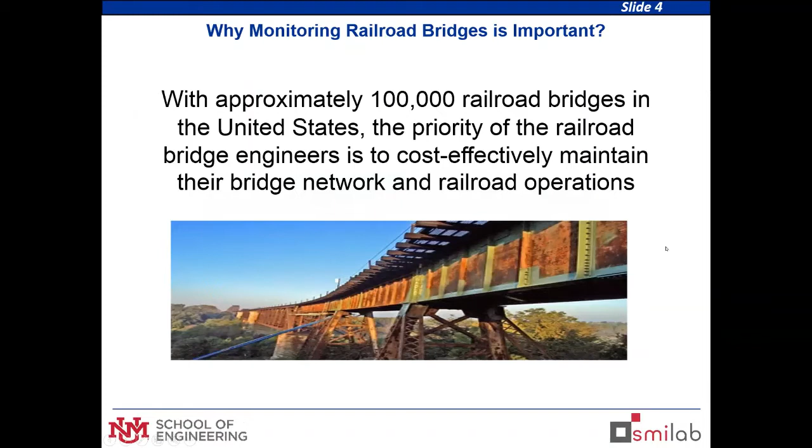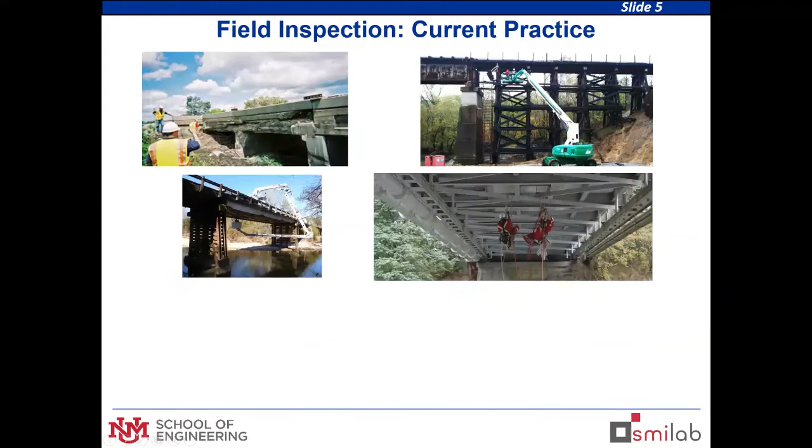The motivation is the monitoring of infrastructure in transportation infrastructure. The background of our research was specifically on railroad bridges. With approximately 100,000 railroad bridges in the United States, the priority is to maintain and repair management approach of this problem. So we're going to talk about maintenance of existing infrastructure, the state of the art, as some of the former presenters showed us.

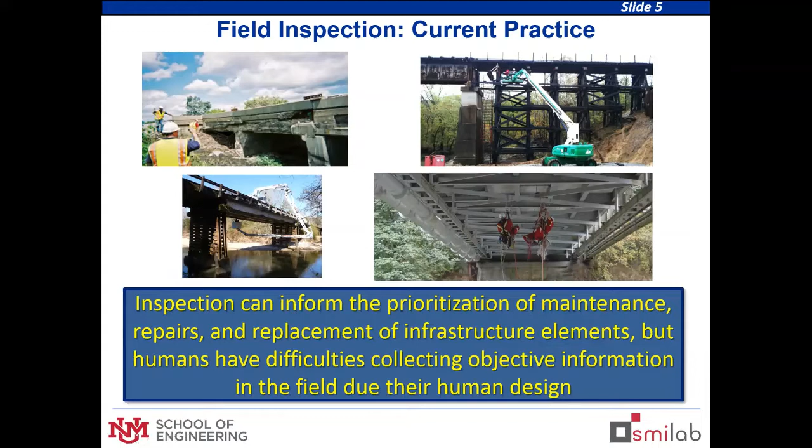You could see the inspection can inform the prioritization of maintenance, repairs, and replacements. As you can see, this is conducted by humans. So what we are looking at here is applying technology to monitor these critical bridges or nodes of our infrastructure. And we are interested in using sensors. We've been using sensors in the past. We build wireless sensors and attach them on the infrastructure, but they are costly. They take time and access. You need to actually climb to that structure to attach your sensor.

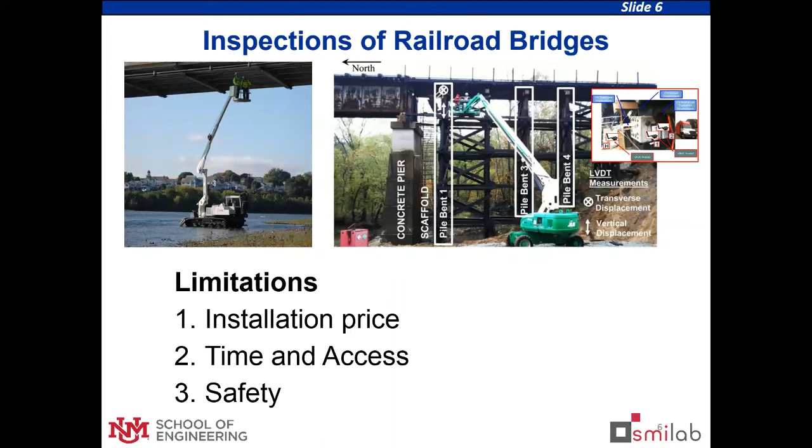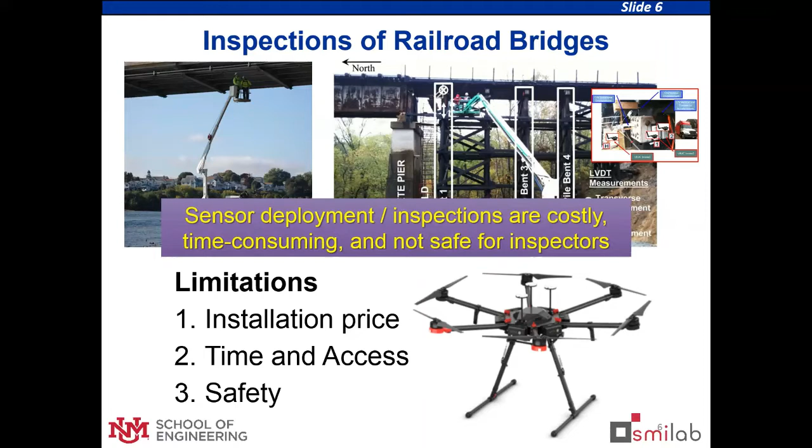So we are trying to explore other approaches, which is with the use of drones. And the goal of this presentation is to actually explore how can we enhance the drones to collect information by adding some devices to these drones. So the traditional monitoring with the UAVs is using cameras, where you can collect videos or images of that infrastructure, and you can inform of the condition of that bridge.

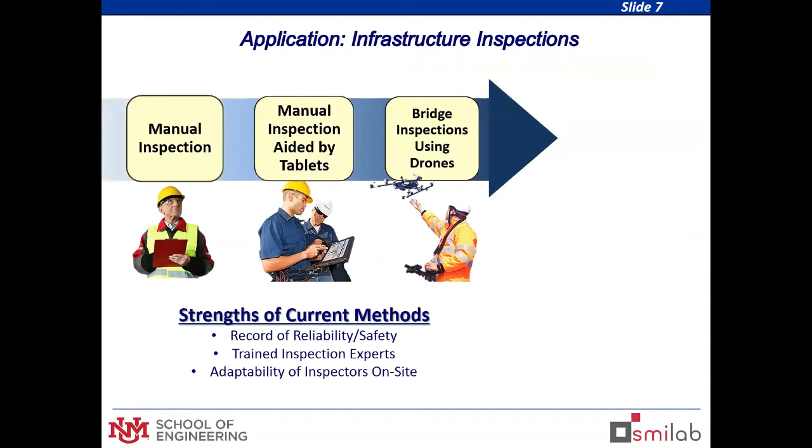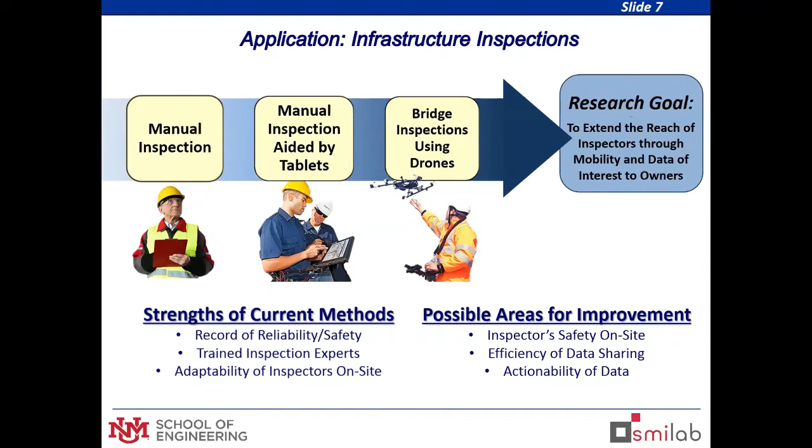We are interested in using computer vision for obtaining this information, but we are thinking, could we actually collect data on real time using the drone that tells you the condition of the structure on real time? Can we actually sense the status of the bridge? We've been using this enhanced drone for structures.

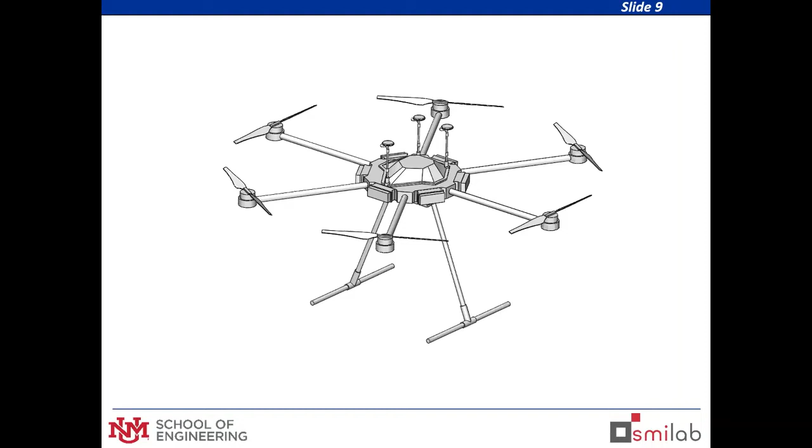We have interest on large drones in our application because we're gonna attach hardware and software that drones don't come with. So we're actually interested in building our own types of drones. So it's related to this stakeholder-based sensing. So we ask the stakeholders, what do they want to collect? And we create the drone to collect that information.

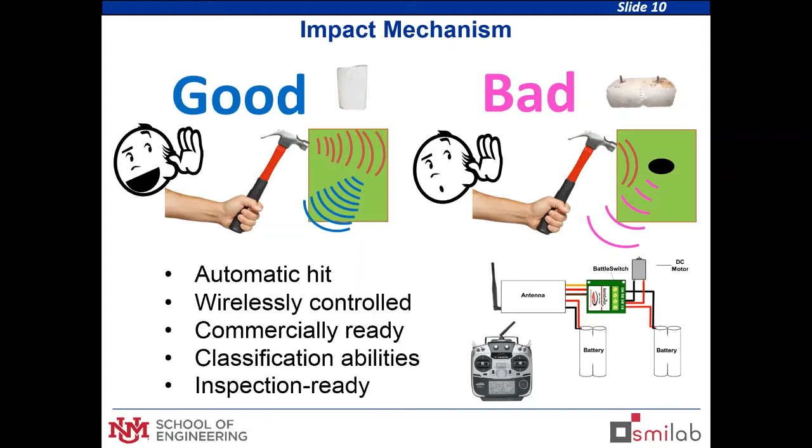One of the areas that we work, actually this was work with the Los Alamos National Lab, was to create this hammer that the inspector uses for collecting this tapping without climbing. So we added a hammer to the drone, and in fact, this is a Tran-SET project, for Tran-SET 4 we are going to use for rocks of interest for the NMDOT. But this was the incubator of that tap testing. And in this case, we created an off-the-shelf wireless tap testing that we designed so it wouldn't have a resonance.

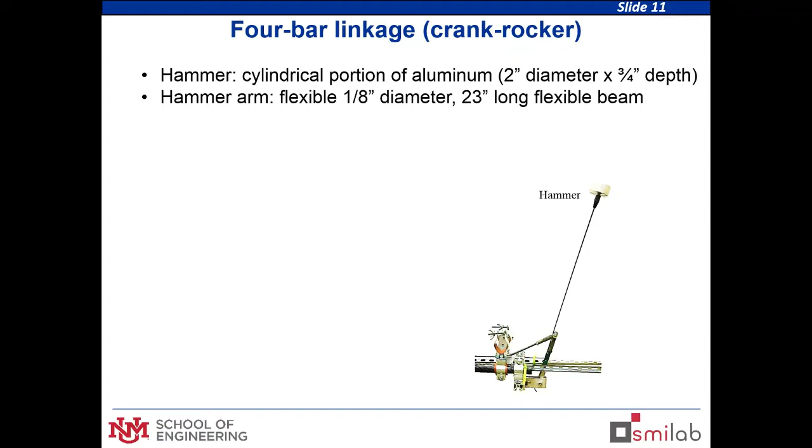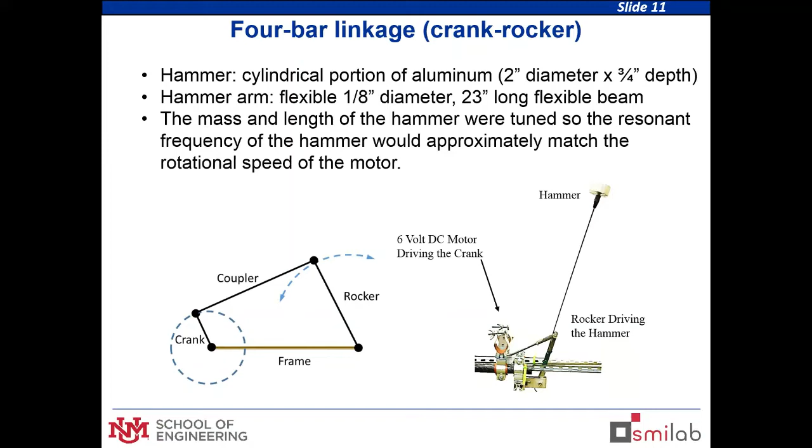Dr. Mascarenas in Los Alamos and I worked one summer. Emmanuel Ayorinde, he actually was a community college student in mechanical engineering who did very well, and they actually won the summer student competition. And we created a crank rocker. It's a very simple mechanism where you can have an eternal tap testing with the same frequency and energy, so that way you can compare the taps that you obtain.

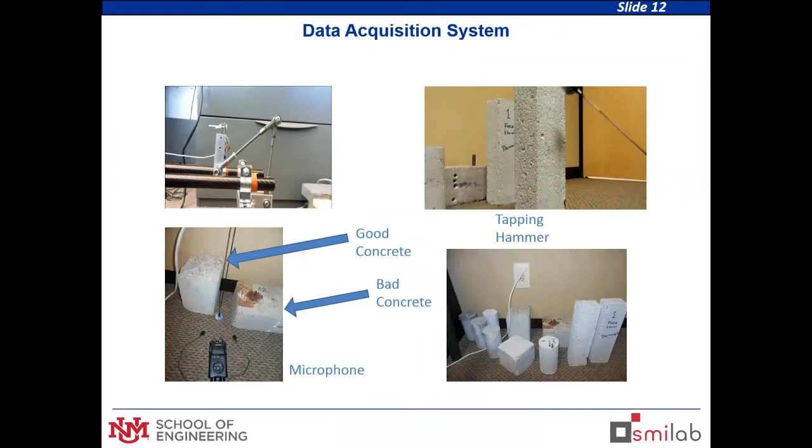This is the drone that we created, and this is a little example of the crank rocker. It's a couple clevises and a 6 volt DC motor that can be tapping with that hammer, and with the sound we conduct a machine learning approach of that sound. In this case we use 5 samples. It's a little loud, let me lower this down.

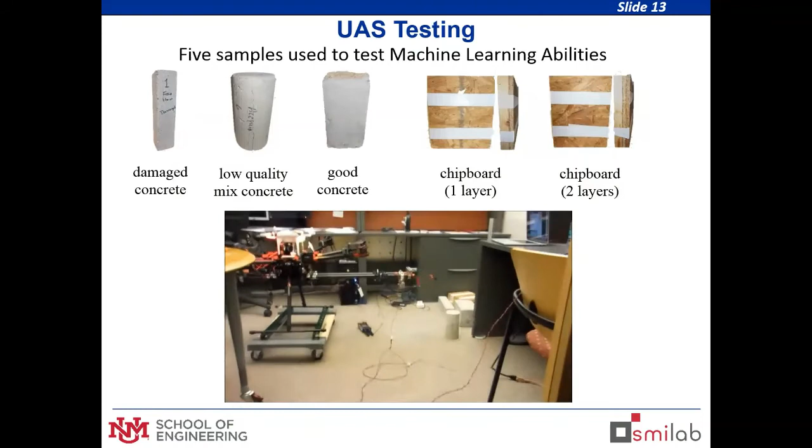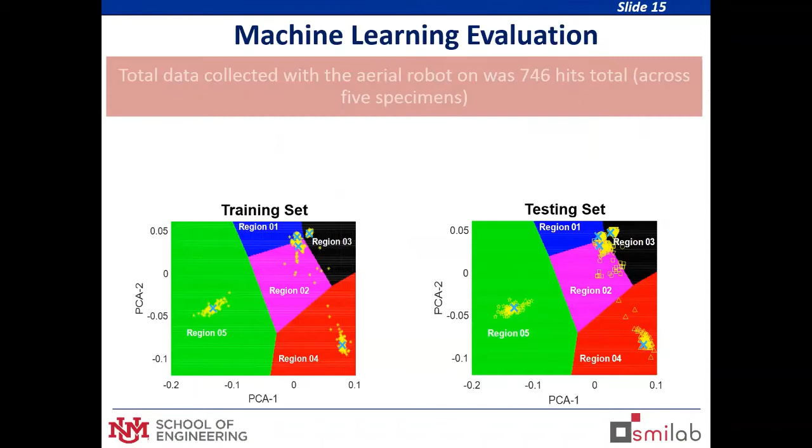But keep in mind, these were similar specimens, and we didn't filter the data—we just hit. We even used the first hits and last hits, which we should have removed because they had less different energy. Even then, we wanted to show what we got, and it was actually very good.

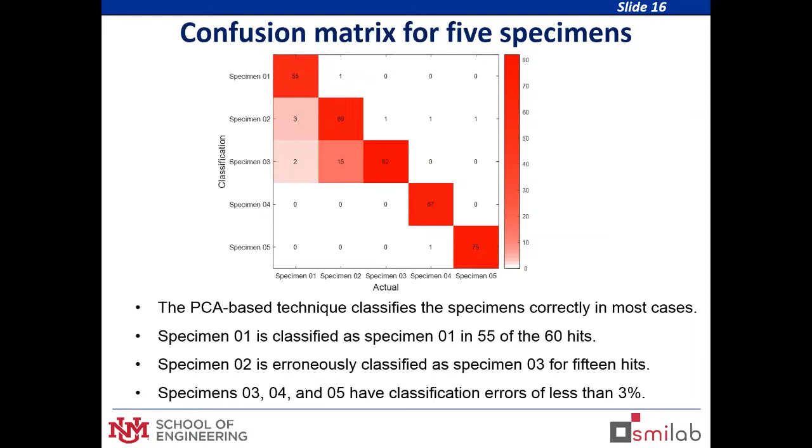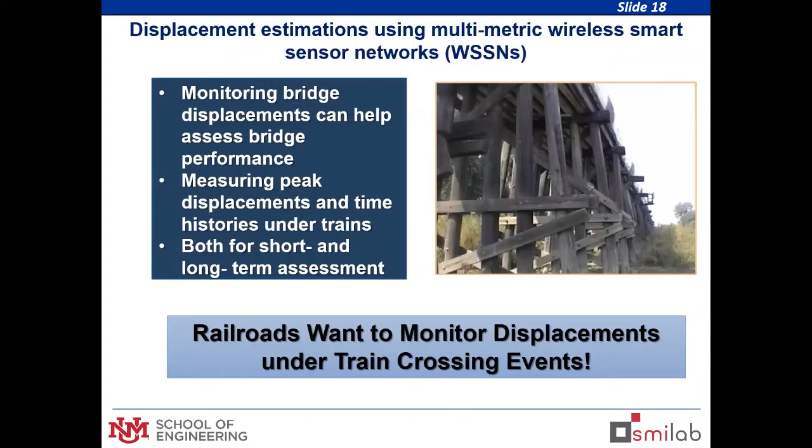So we were thinking, okay, we install the sensor—we're going to have to climb there. Actually, we did that; we attached a sensor on the pier. But it would be nice if instead of climbing that 15 feet, you could fly a little drone without having to climb and wait for the train to know if it's 1, 2, or 3 inches, instead of having to look with your eyes. My eyes are not that good anymore.

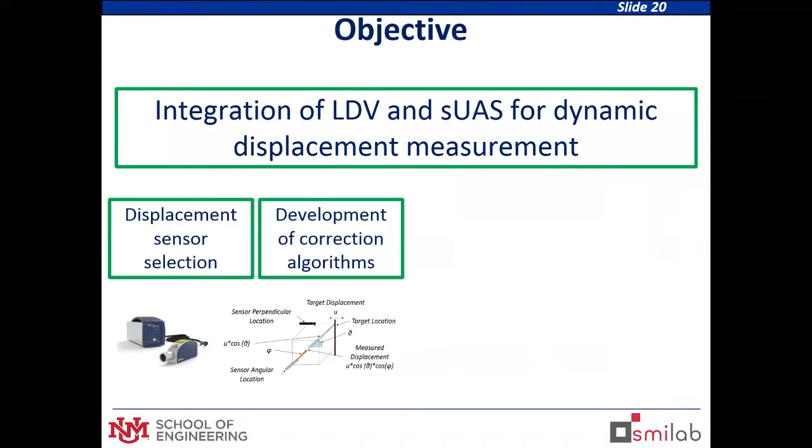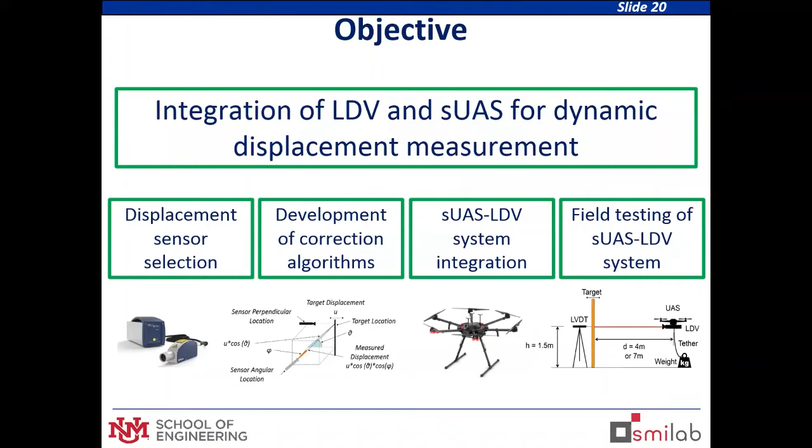So we are looking into integration of a laser. This is the work that Piyush Garg did for his master's at UNM in electrical and computer engineering. It was an excellent dissertation—attach this vibrometer to the drone, fly it, shoot the laser, and see how much is moving.

Thank you to Dr. Jan. This is Piyush Garg running his dissertation there in real time—this is the laser and the bore, and this is the displacement monitoring validated with the LVDT. As you can see, the drone has a tether, and the laser results were actually excellent.

But we have some limitations I want to share with you. The laser had excellent accuracy, but it was too heavy, and you could say also expensive. By talking with DOTs, they are interested in more—they're thinking, well, if the drone crashes, then I lose $100,000, right? So no, they don't want that. They want something that is low cost.

They're also interested in combining the drone with other technology to obtain the pseudostatic, non-dynamic, low frequency responses on those vibrations. And they also want to measure on real bridges—we heard that from them. They don't like the tether; they want to fly the drone high and far without depending on a tether.

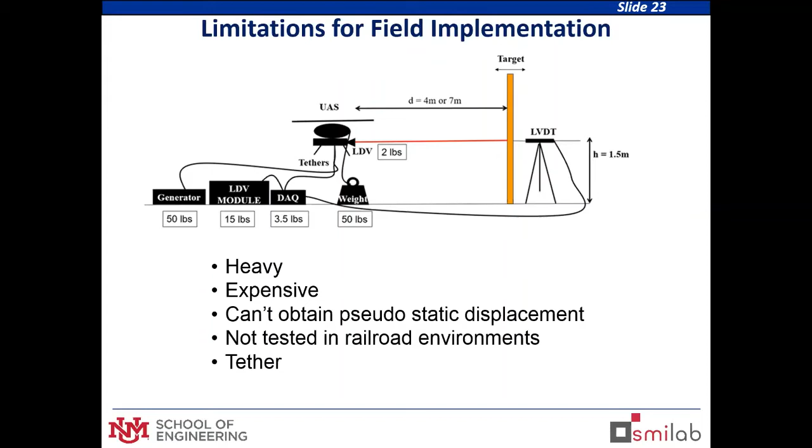So for the field implementation, what we've been working on closely is this TRB project IDEA, with our panel review over the last year and a half. This is a strong involvement with the railroad TTCI—thank you to Martira Mullin, Sandro Scola with CN, doing work from TTCI in Pueblo, Colorado, and we have Dr. Fierro from UNM and David Mascarenas with Los Alamos.

Very good panel review. This is one of our visits last year to TTCI, where we had some exposure to the group and could see the bridge. We were planning on doing this before COVID, so you can see these nice deck girders, how we could fly our drone. And this is Roya Nassimi, Jens Woodall.

Roya's topic is the bridge. Now we have Maimuna, Shin, Rafa, Dilendra, Sang. It's about 4 hours from Albuquerque. This is what we're thinking when we can go.

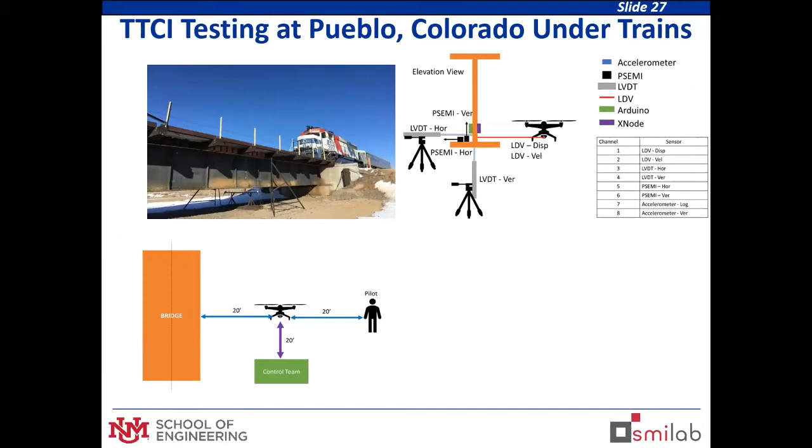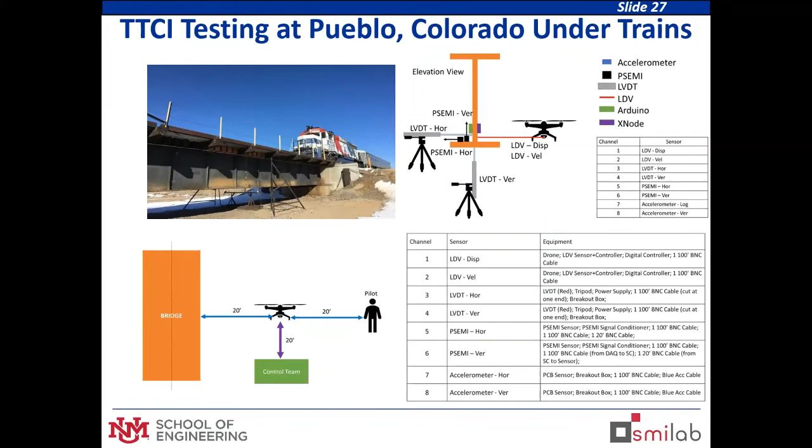We're going to have the LVDT, and we're going to have the drone about 20 feet away—actually, we're going to get closer than that, but it's going to be in a controlled environment. Safety is their concern. These are some of the initial plans we have with Dr. Ali and Biden Liu when he was here for that field implementation, and this is the instrumentation we're going to do for the field validation at TTCI.

So this is kind of the plan, and this is what we've been doing in Albuquerque to prepare for that. This is Roya supervising the flight. As you can see, we're writing papers for this—it's actually a very successful topic.

We like drones, and we like to attach different enhancements. You can see a close look at the laser that the team put together, and you can see the computer vision working there.

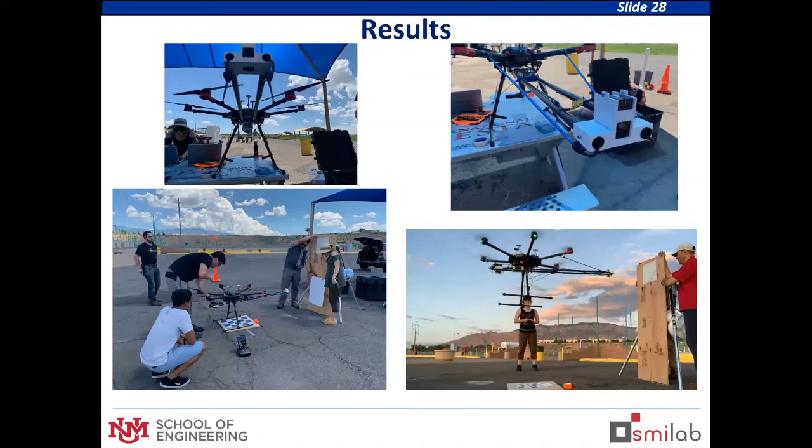We have been very successful in terms of the field implementation, and we are publishing these results. This is another video. I know on Zoom it may not work so well.

This is Roya, this is Nicholas, the pilot, soon to be a doctor with his electrical and computer degree. This is the flight, again, untethered, completely wireless, all developed by the students. They did everything that you see in the air.

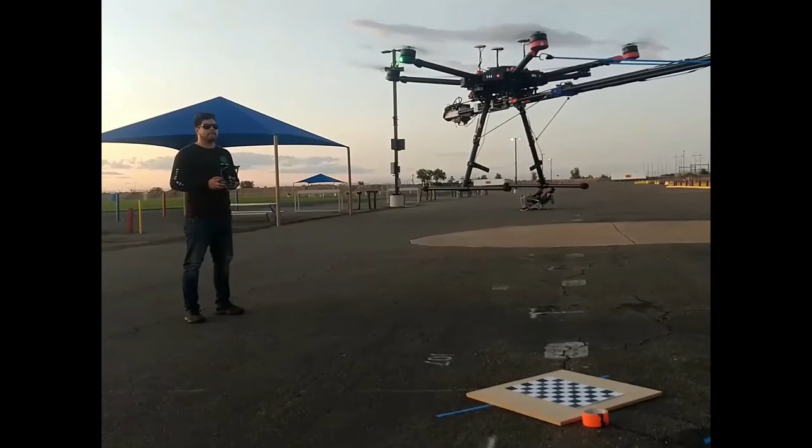So I will stop here with the conclusions. We are very interested in enhancing drones for the DOTs. We know NMDOT is interested in drones, and we know other DOTs are interested in drones too. We want to sense the structures besides using computer vision. We're interested in computer vision, in any machine learning or artificial intelligence approaches for that data acquisition, and in mechatronics, robotics, and signal processing.

So we're going to enhance the sensing for the owners of their bridges. Whichever they want to measure, we'd like to build it for them. We want to ask the owner what they want to collect, and we will attain it safely.

One of the outcomes of this approach is that the students become their own CEOs of their ideas. They submit their patents with the University of New Mexico, and they can get credit for the inventions they do. They prepare for the reality of 2030, which is civil engineers teaming up with other fields—mechanical, electrical, computer engineering—working together, programming interfaces, and owning these inventions. It's very fascinating to be a witness to that.

We'll be waiting for the testing on the real train crossing event.